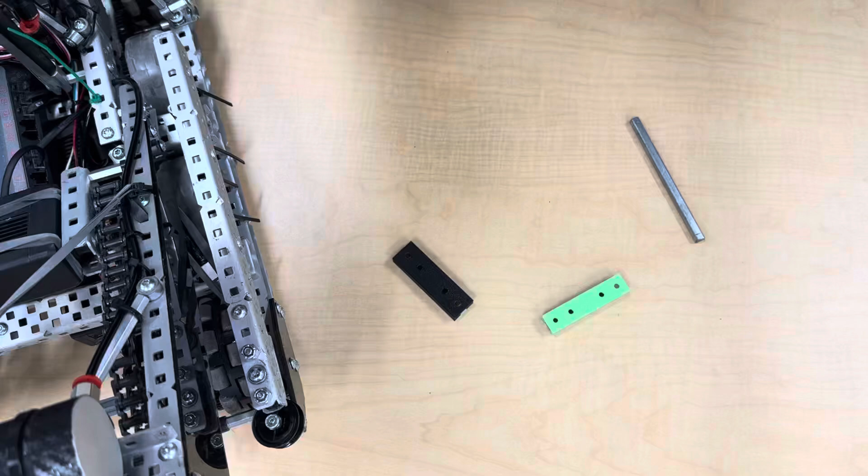Hello, this is Daniel from Team 84886A, and today I will be showing you how to drill holes through high-strength shafts. A lot of teams have started using high-strength shafts as robot structure because, quite simply, they do not bend.

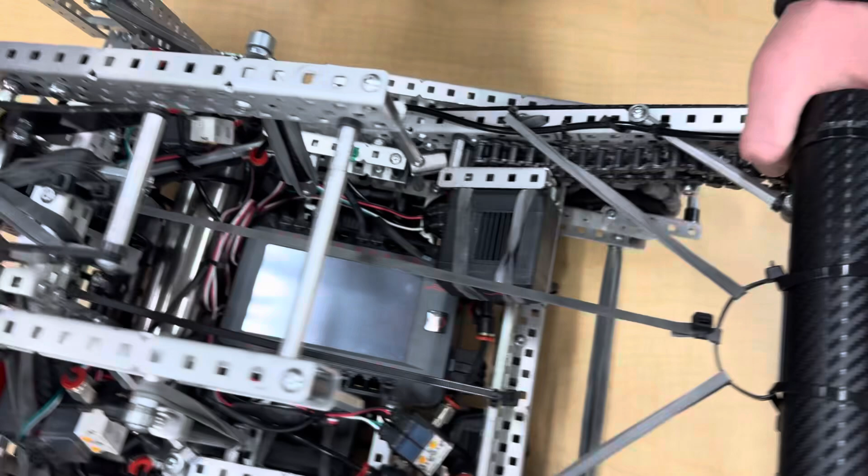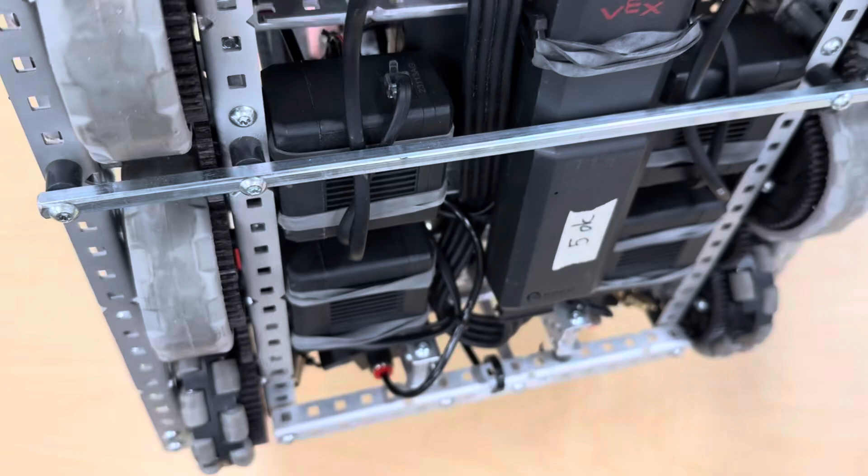We've done this in a few spots on our robot. This is our over-under Worlds robot. We used it on our hard stop, on our intake here, so it doesn't bend at all, and on our wheelbase on the bottom. This keeps everything aligned and it does not bend at all.

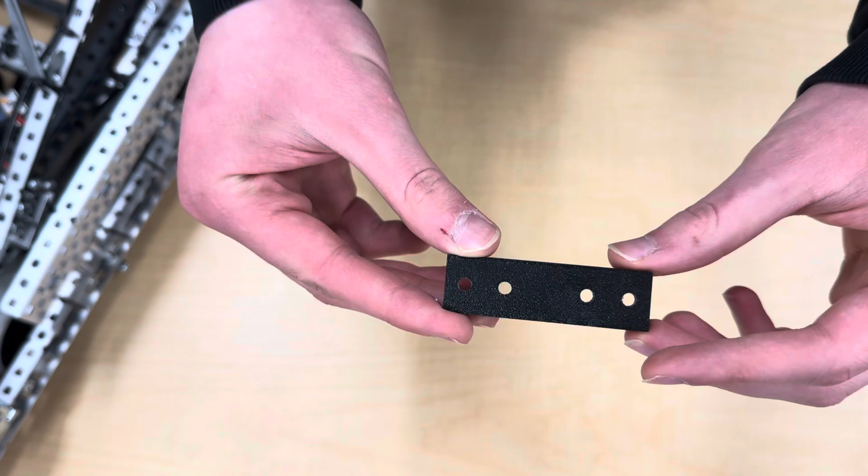However, a lot of teams have had questions about how to drill through high-strength shafts. I tried to do it before and had a lot of problems with it. So back in January, I designed a jig for it. This is the original design, very simple, 3D printed. It worked. I used it for all of the high-strength shafts on our robot. But I made a second version that I will be showing you how to use today.

I do need to interject here to say that tools are dangerous. If you don't feel comfortable using a drill press, ask for help. Follow all safety precautions when using tools.

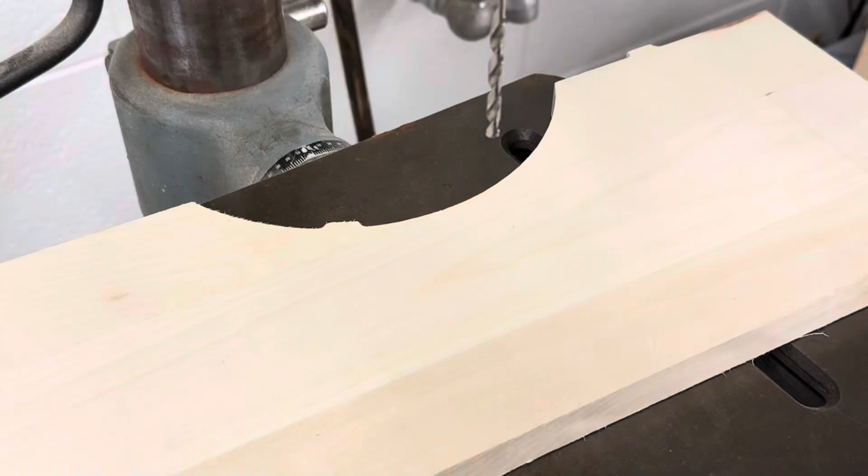After 3D printing, the holes will not be perfect, so you'll want to clear them out first. I used a 0.169 inch drill bit for all of this. I'm gonna drop it down. Just clear out the holes.

Once you have your holes cleared, you can take the shaft you're planning to drill through and simply slide it into the jig and align the end of the shaft to the end of the jig. And place this down and start drilling through it.

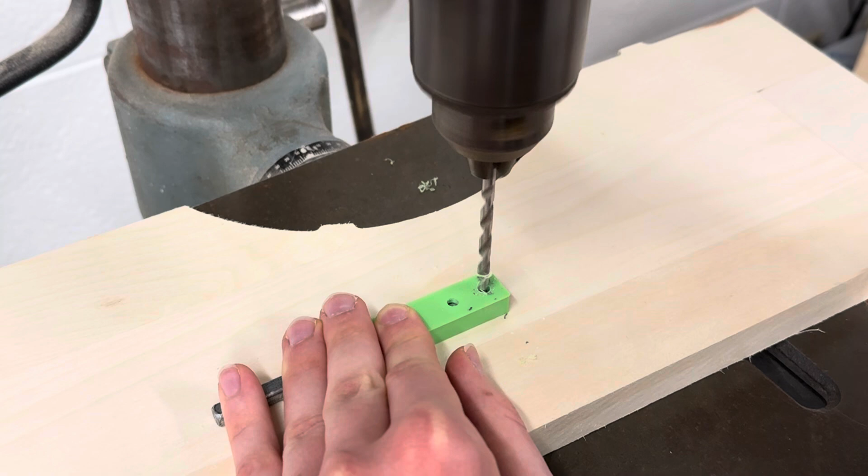While drilling, you have to do it very slowly because if you do it too quickly, the plastic will melt.

Once you have a good hole, you do not need to keep the jig on the shaft. You just go finish it off. Once you get all the way through, you should have a perfectly centered hole.

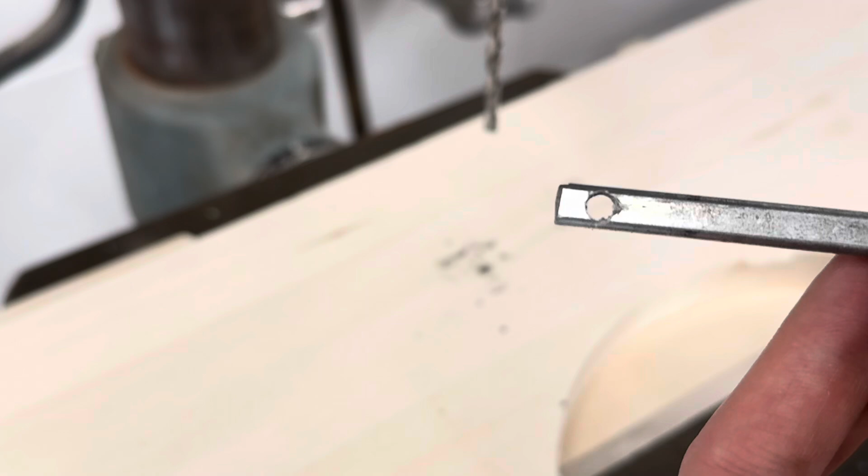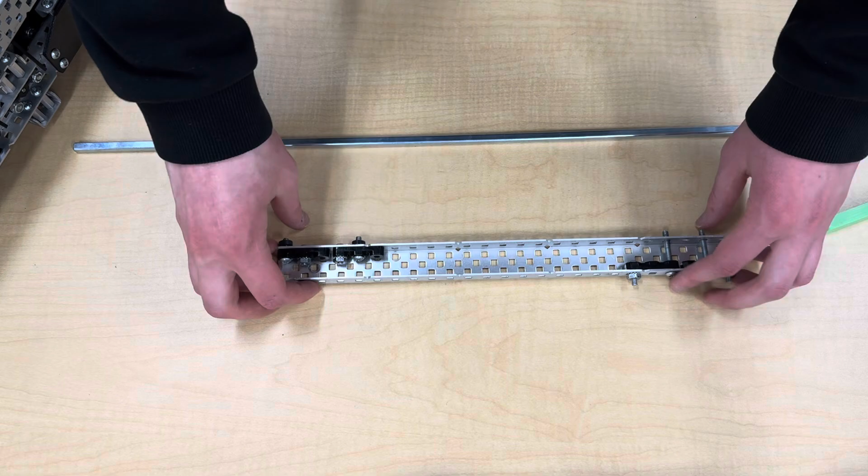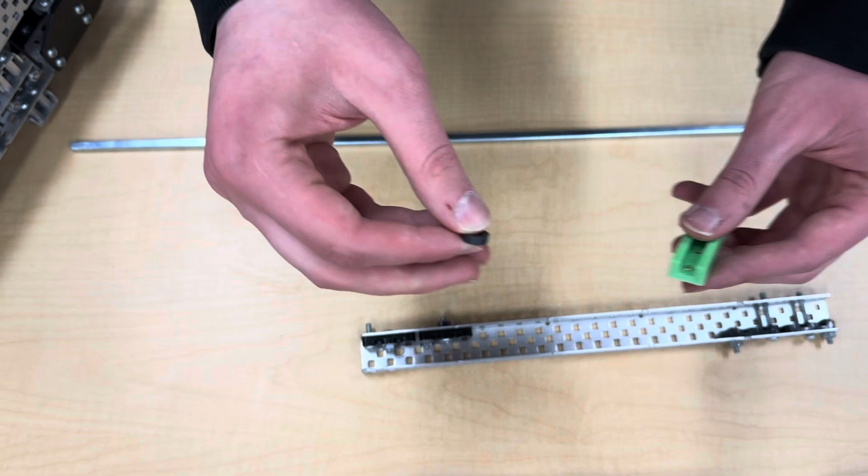If you are using a longer shaft, like for a wheelbase where you want the exact spacing for both sides, you can use a setup like this, just a C-channel that's the same width as your wheelbase. Gonna have two screws here aligned with bearings with 0.125 inch spacers, which are the same height as that part of the jig. So then you can insert these into the holes you drilled on one end of the shaft, and then align these inner holes of the jig with longer screws on this end. And with this, you are able to fully mark out where you want the jig to be on your shaft.

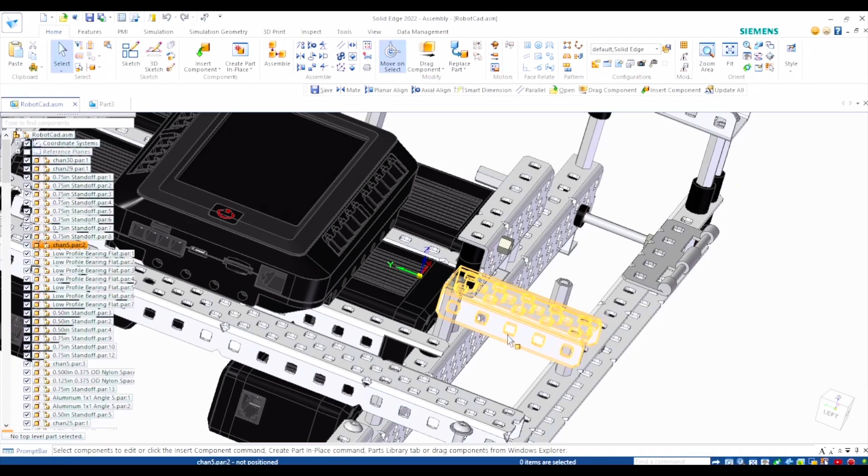The files for the jig are up on GitHub, but if you want to design your own, it's quite simple. Mine was designed specifically for a 3-wide gap in a wheelbase, so just 2.5 inches from one end of the C-channel to the other end of the other C-channel. If you want to do a 4-wide gap, it would be 3 inches across, but for a 3-wide gap, it's 2.5 inches. The walls of the jig are 0.15 inches.

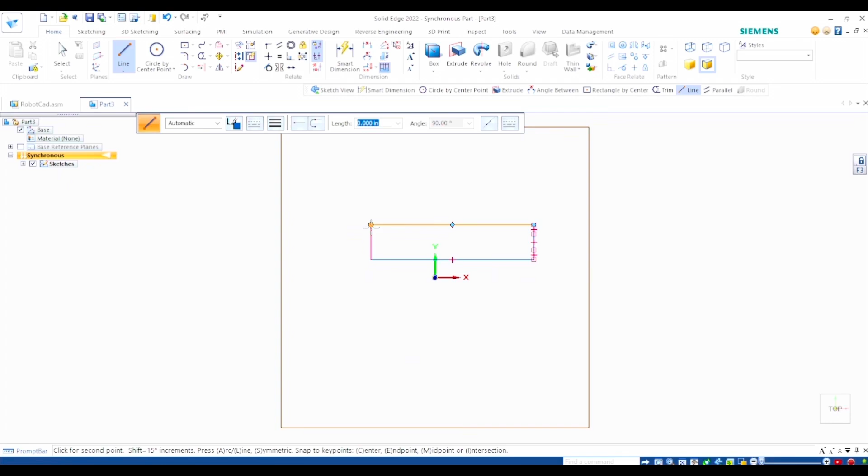The shaft is 0.2. Another wall, 0.15. You just want to close it all off. I am designing this in Solid Edge.

The outside holes are 0.25 inches from the end, and then I like to add a 0.5 away for the alignment hole. Do that from the other side as well.

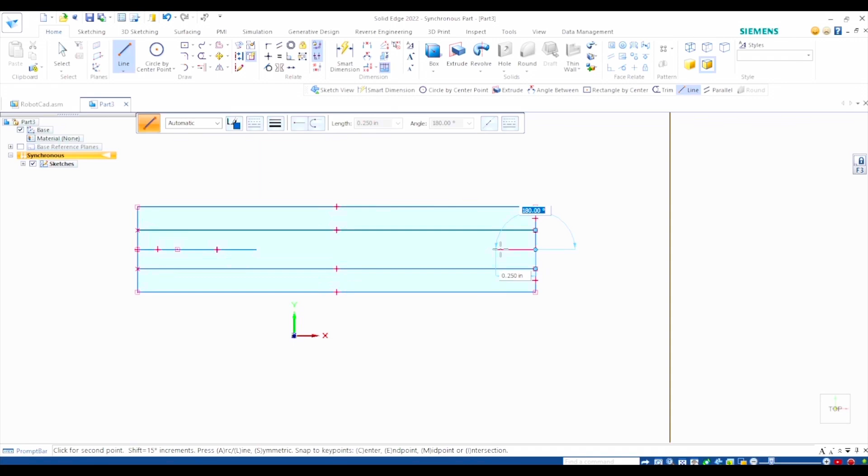Then I do the holes as 0.175. Then you just extrude the walls as 0.375, and then the center is 0.125, same as the spacer.

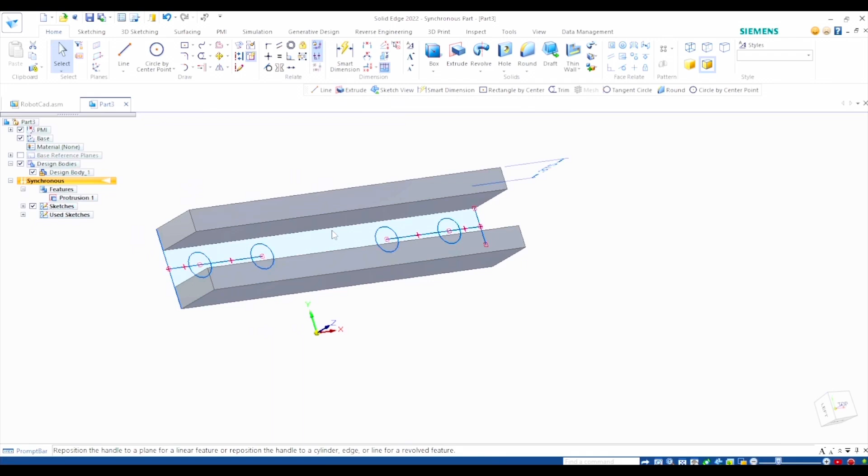And you now have a jig ready to be 3D printed.